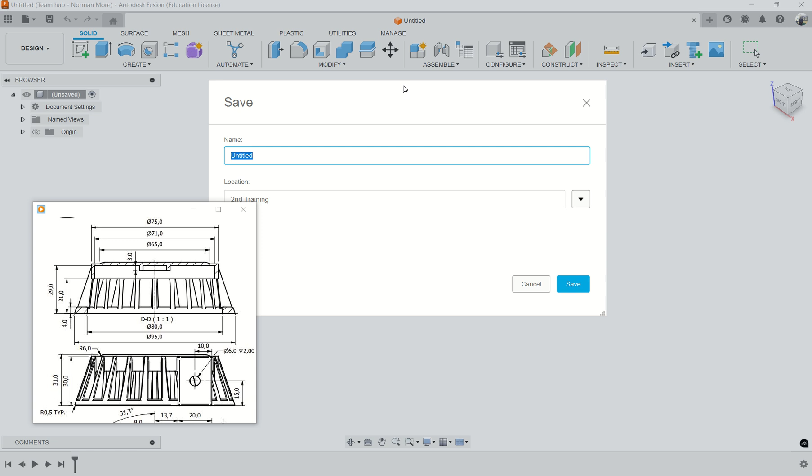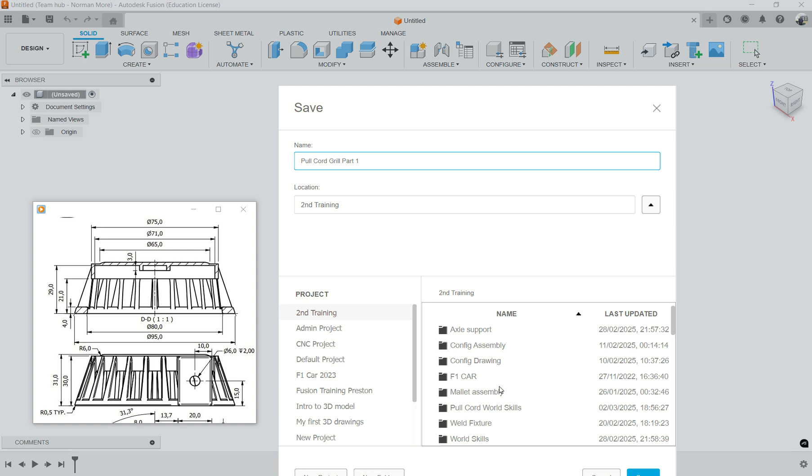So as usual, we start with saving. So I'll call this pull cord grill part 1. I think I already have a folder with the same stuff, so I put it there.

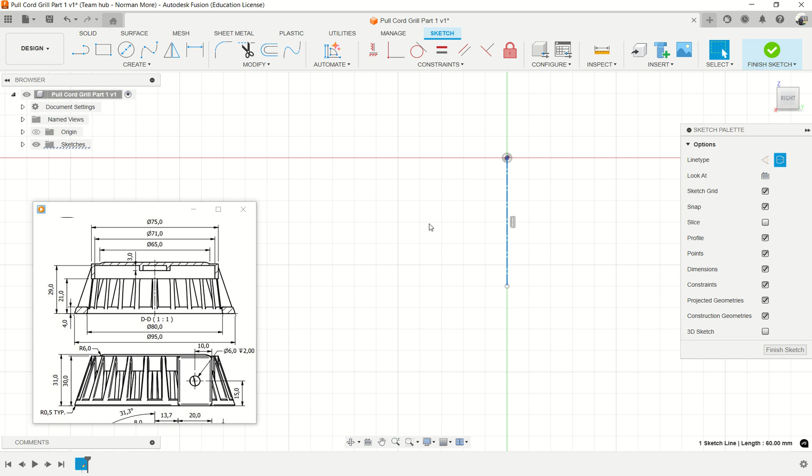Now we can use the front view, and then we shall draw that cross section there, which you see very quickly. We need to draw a center line, which we shall use to do a rotation. Change that to center line so that instead of dimensioning length, we dimension diameters. Then I'm going to draw that profile without any dimensions on it. Let me draw one part of it first, and then I put some few dimensions on the outside.

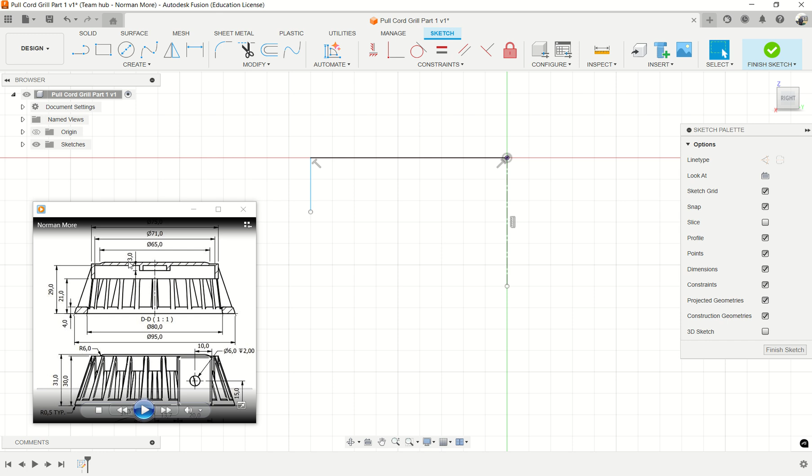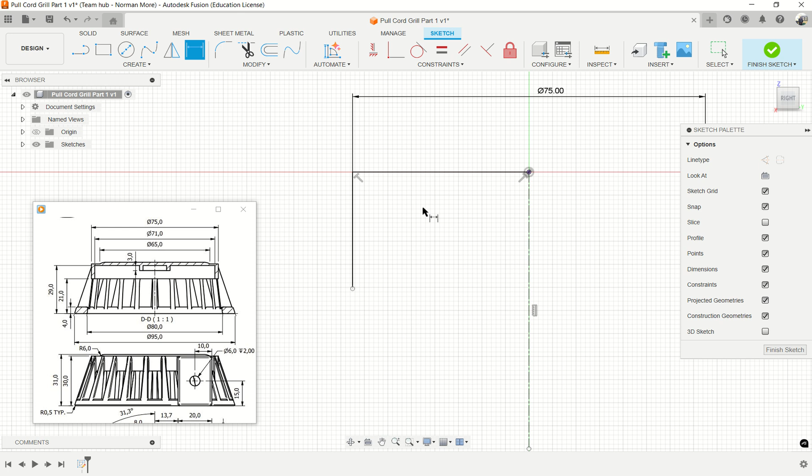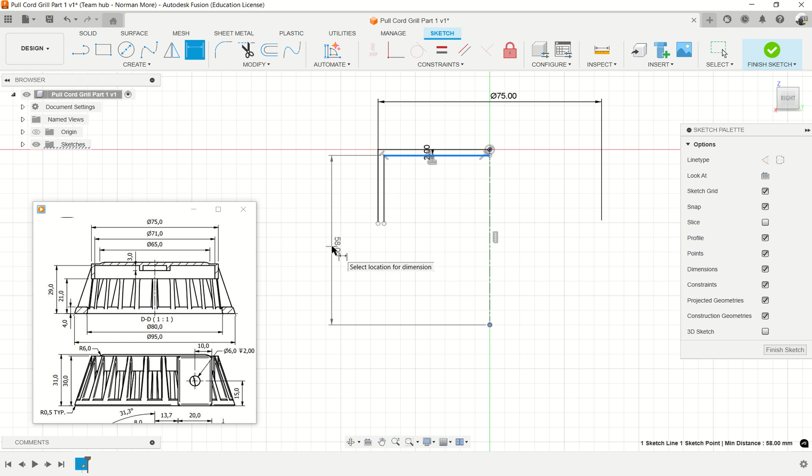So from the center to that end, which will be the longest, you see that's already a diameter. That will be 75. And then I will offset this one to one side, which should be the lower side. So I put -2. And then I will also put the vertical length from the inside of that to the end of that. Let me put that as the base. There we have 29 mils.

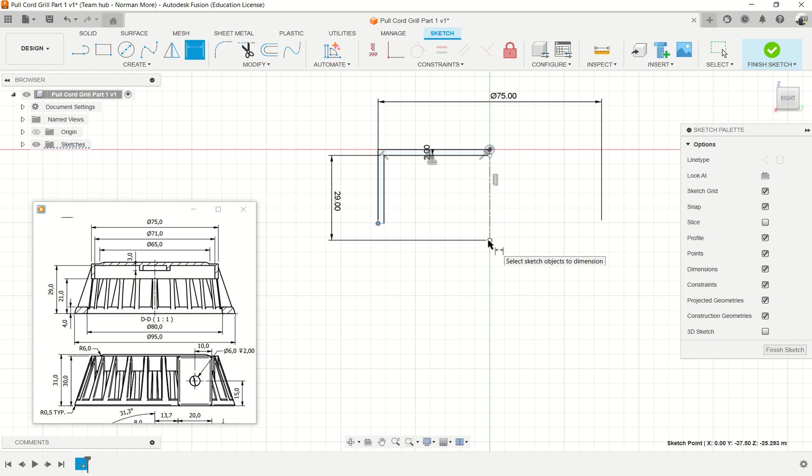And then from the end of this edge, let me add a line there. We close that one. From the end of that edge to the end of this line should be 21. So I put a dimension on that line from there to the end of there. That should be 21.

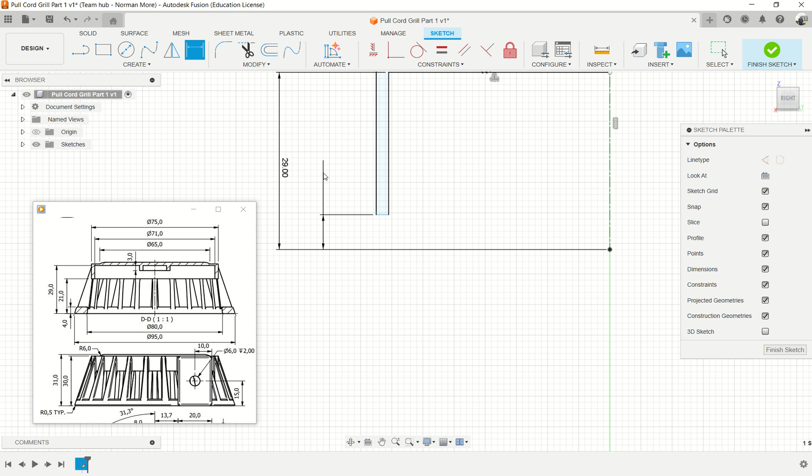Then after that, we know that in between here there is a hole, which we can add by adding a line from there downwards, which is actually 3 mils. So we can straight away put 3 mils. Then offset that one with the same thickness, which is 2 mils. That's the thickness of the material. And then these are the positions entirely. Then we do the dimensioning of the holes.

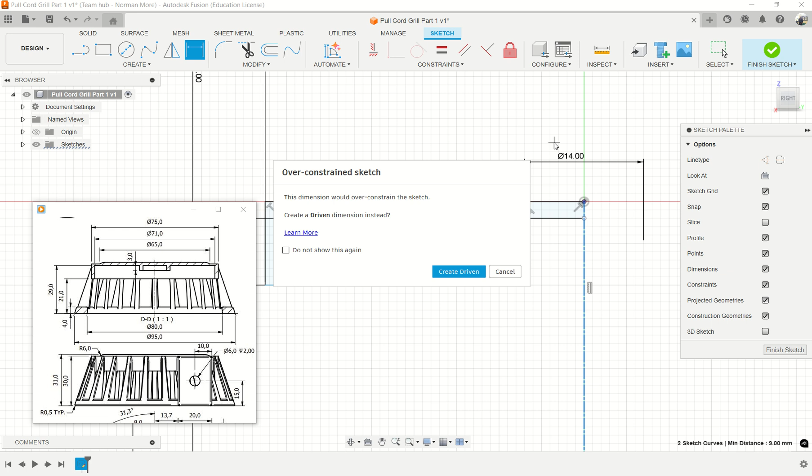One of the holes will have a diameter of 14, which is from the other drawing, which we are not seeing here. And then the outer one is going to be 18. Oh, yeah, because there's already a 2 there. So I can remove that 2 because I want to keep the same dimensioning as the one in the drawing. And then I put that 18, and then I close off this.

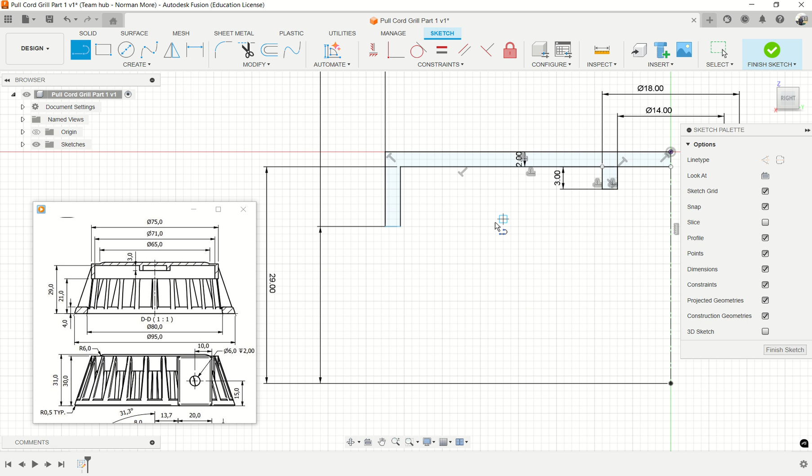So after closing that one, then I'll go up here in the corner, there is 65. So I draw another line coming down. I will trim it afterwards. So if I trim off that, and then halfway that one, I will draw another line halfway this, going that way, and then trim off. If I trim off all that, that makes that corner.

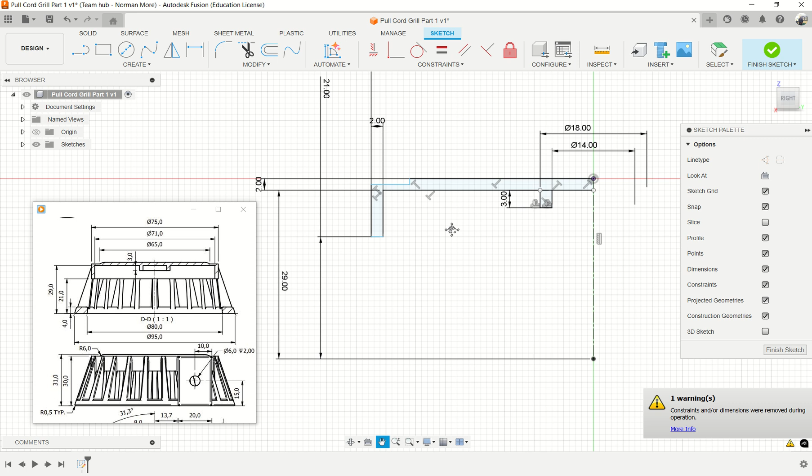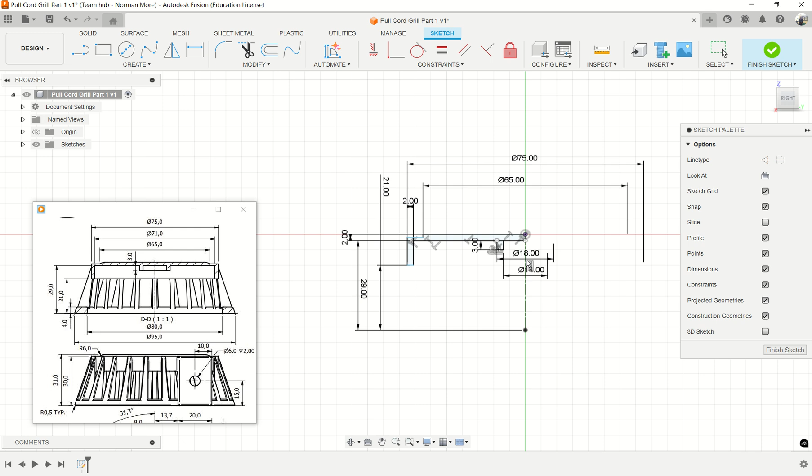And really the distance from that point to the center of the line is the dimension which we need, which is the 65. From the drawing, that is 65. You can extend these ones here so it is clear. These two are for the hole. These ones I can push them down.

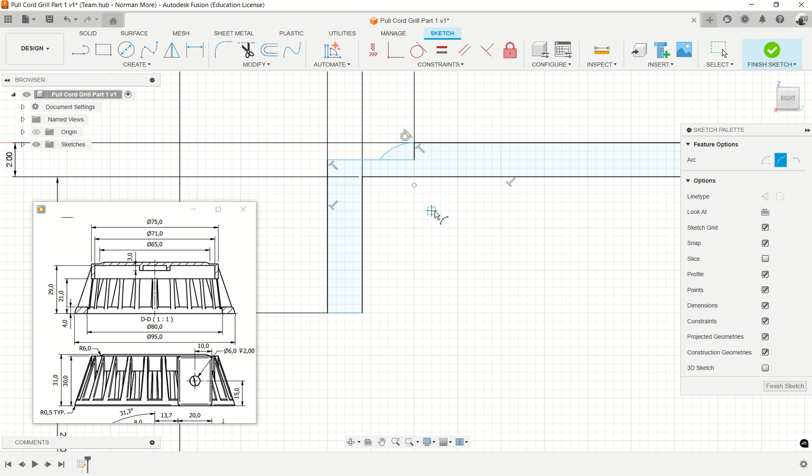And then I'm going to put an arc. I'll use a 3-point arc in this corner here, starting from there to that line and in that direction. And that one is 6 millimeters. So that will be how it is on the side there. So ideally that is finished now. All I need to do is to put the bottom,

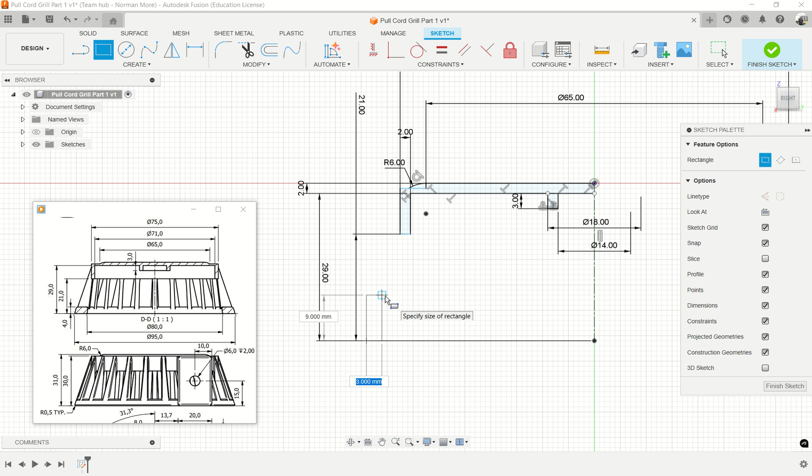and the bottom I'm going to put a rectangle. I'll use this corner rectangle and draw a rectangle which is going to be 7.5 if you do some little calculation, and then with a height of 4 millimeters. And this one will add some dimensions. I'm going to remove this just so that I can be able to put the horizontal dimensions. So I remove that one, and then I do from here to the end here.

That is going to be, sorry, I need to use the center line so that we get a diameter. So from here to there, there is a diameter there which is 80. And then the outer diameter is 95. From there to there, yeah, because that one I've already done it. And the heights are okay.

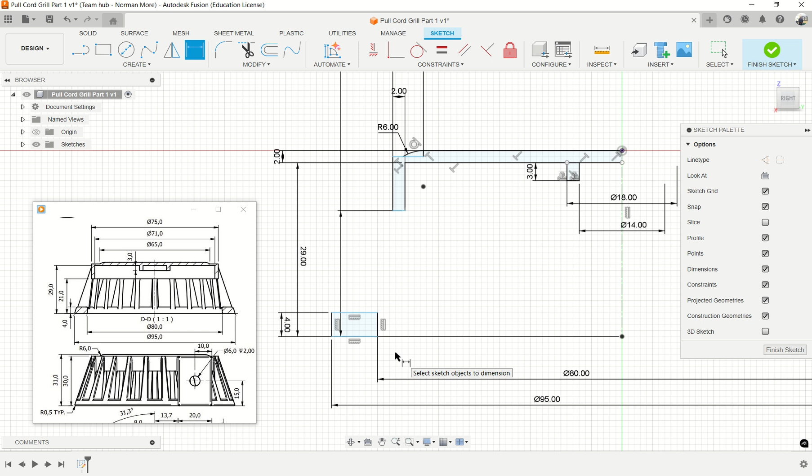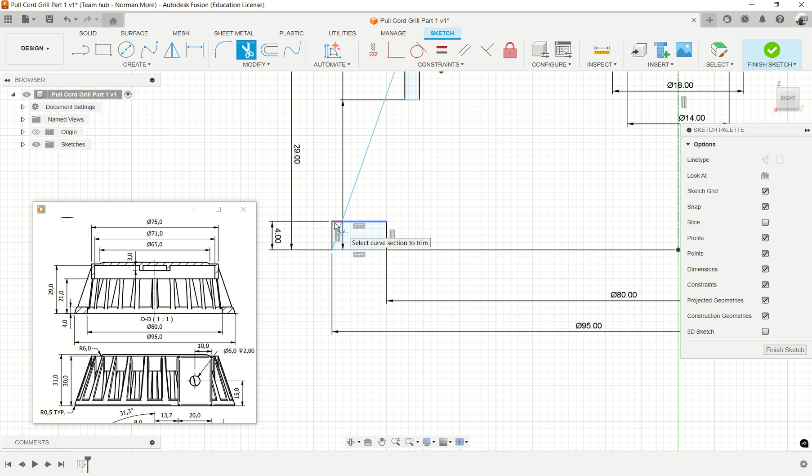So what I need now is to pick a line from around halfway there and going down there, which will make the shape at the bottom, which is basically a draft angle, as it is called in engineering, especially this one being a plastic product. So now the drawing is already finished.

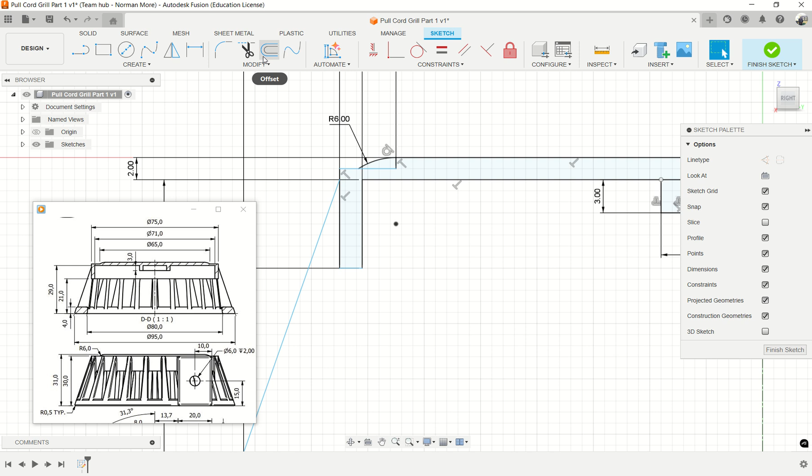I need to go and do a revolve. So I'm going to first do a revolve of, just a moment, I haven't trimmed here. The two lines are going to disturb us for trimming. Then I choose that one and say okay, and that is the first shape.

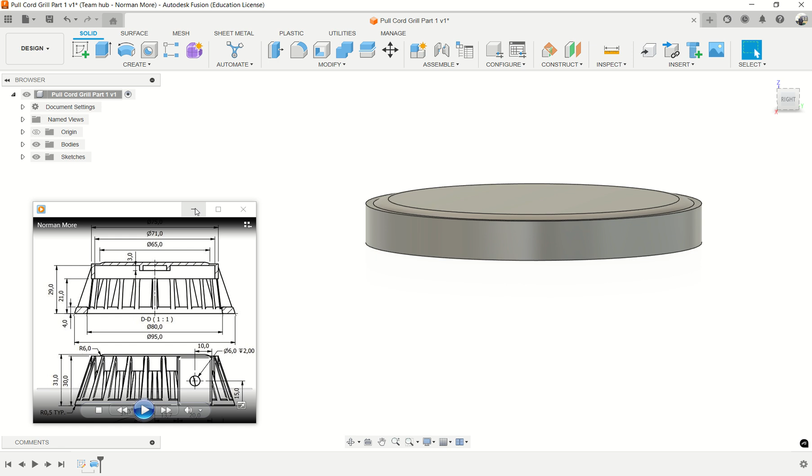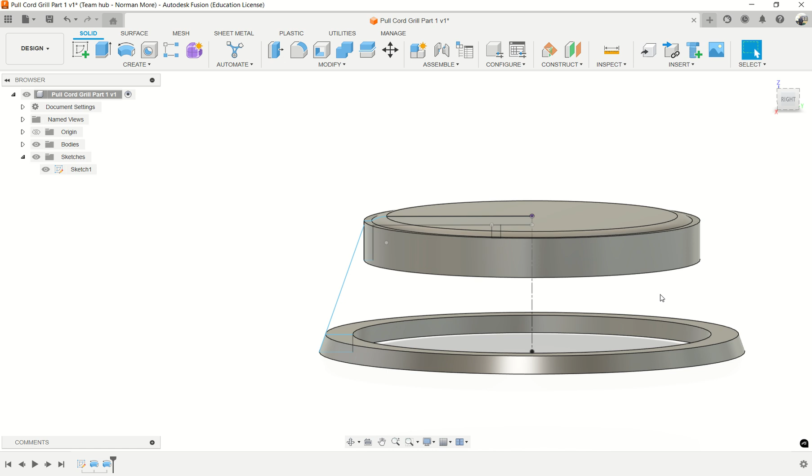Now I will hide that one. The sketch has disappeared, so I switch it on again and then revolve again, and this time I revolve that and click OK. So this is now the top and the bottom part, and that finishes the first stage of this drawing. Then we'll go to another one in a moment.